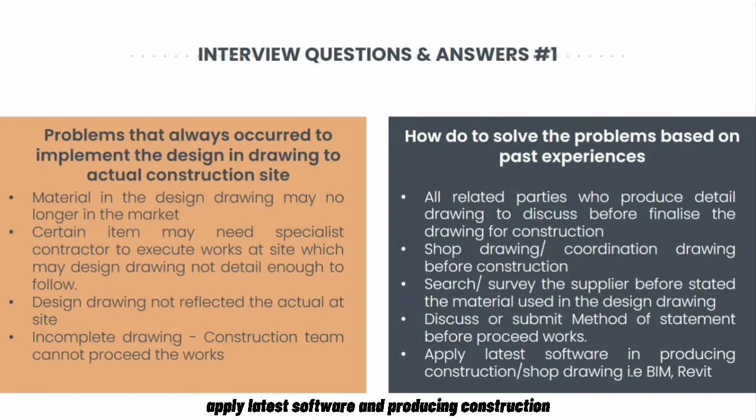Based on Mr. Muhammad Azri Sidek's opinions and experiences, all related parties who produce detailed drawings should discuss before finalizing the drawing for construction. Shop drawings or coordination drawings before construction. Search or survey the supplier before stating the material used in the design drawing. Discuss or submit a method statement before proceeding with works. Apply the latest software in producing construction shop drawings, for example BIM, Revit.

The next interviewee is Mr. Zamzan, who is an engineer and project manager who works at MTD Construction Sdn Bhd, for 29 years. Based on Mr. Zamzan, the problems that always occur when implementing the design and drawing at the actual construction site are: the actual construction site condition is not reflected in the construction drawing. The type of design or method of construction stated in the drawing is not suitable or practical to implement at site. Materials listed in the drawing are no longer available in the market.

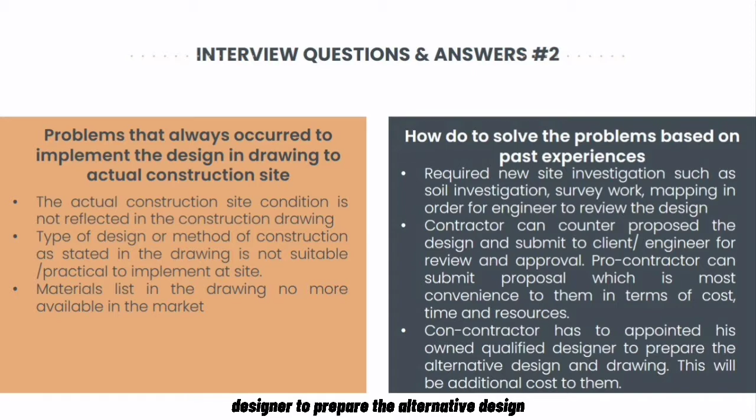Based on Mr. Zamzan's opinions and experiences, to solve the problems new site investigations are required, such as soil investigation, survey work, and mapping, in order for the engineer to review the design. The contractor can counter-propose the design and submit it to the client or engineer for review and approval. The contractor can submit a proposal which is most convenient to them in terms of cost, time and resources. The contractor has to appoint his own qualified designer to prepare the alternative design and drawing. This will be an additional cost to them.

The last interviewee is Mrs. Narashikan Ismail, who is a QAQC manager at MRT Corporation Sdn Bhd, and has 27 years of work experience. Based on Mrs. Narashikan Ismail, problems that always occur when implementing the design and drawing at the actual construction site are the disagreement between the structure, architecture, and M&E drawings. The majority of construction contracts use traditional processes such as fragmentation, or different designs based on trade, causing performance to hinder.

Based on Mrs. Narashikan Ismail's opinions and experiences, the way to solve the problem is to merge all trades engaged by using BIM software or a BIM-based process. Next, strengthen team members' communication, cooperation, and coordination during the design and construction stages.

Structural engineers are typically brought into a project by the architect or building designer and work on behalf of the project owner to evaluate and accept deferred submittals for compliance with the structural plans and specifications, monitor construction, and perform special inspections as defined in the contract.

Conceptual design: the first step a structural engineer will take is to go over the drawings created by the architect or building designer. To get an idea of the various uses of a structure, the engineer will consider a variety of unit types on a larger multifamily project, or the variety of room uses in a larger single-family home or commercial structure. The structural engineers will evaluate the structure's site-specific requirements based on its location. This will include a soil report to determine potential footings, the exposure category to design to, applicable wind loads, and seismic considerations.

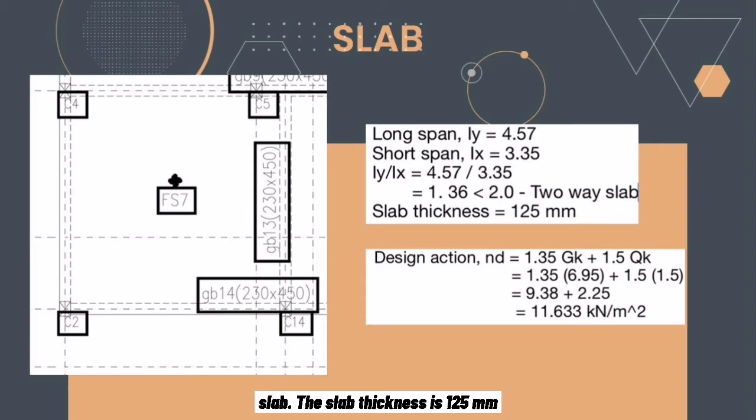Lastly is the calculations for our group slab and beam. This is slab at FS7. The X short span is 3.35 and the long span is 4.57. So we divided the long span by the short span to prove whether the slab is a one-way or two-way slab. The result is below 2, so it means that this slab is a two-way slab. The slab thickness is 125 millimeters. The design action is 11.633 kilonewton per meter square.

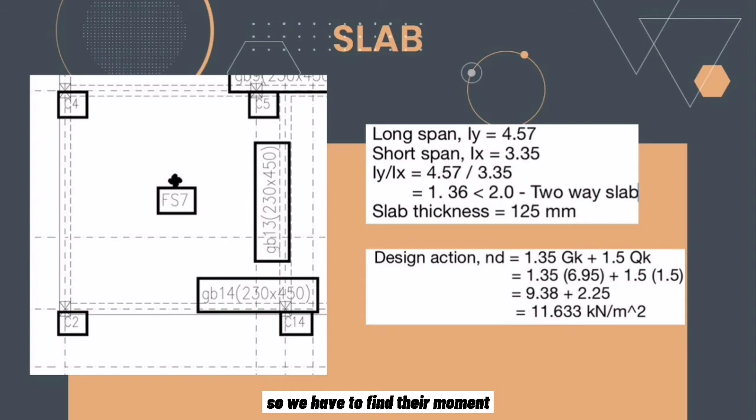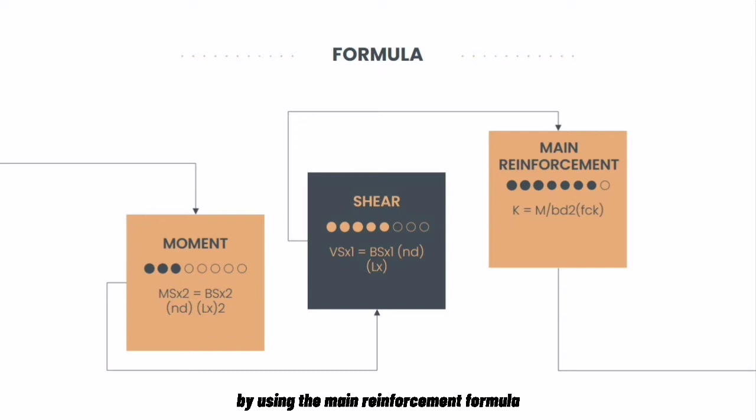For this slab, we figured that it is case 4, which is two adjacent edges discontinuous. So we have to find the moment and shear in the long and short span. These are the formulas for moment, shear and main reinforcement. After calculating moment and shear, we calculate the main reinforcement for this slab by using the main reinforcement formula to prove whether the slab has compression reinforcement or not.

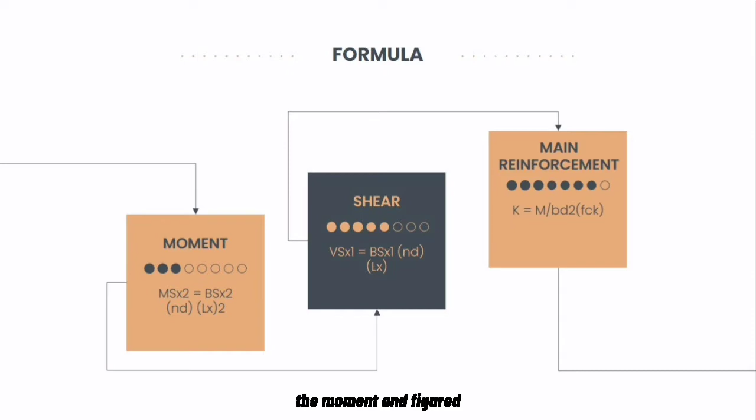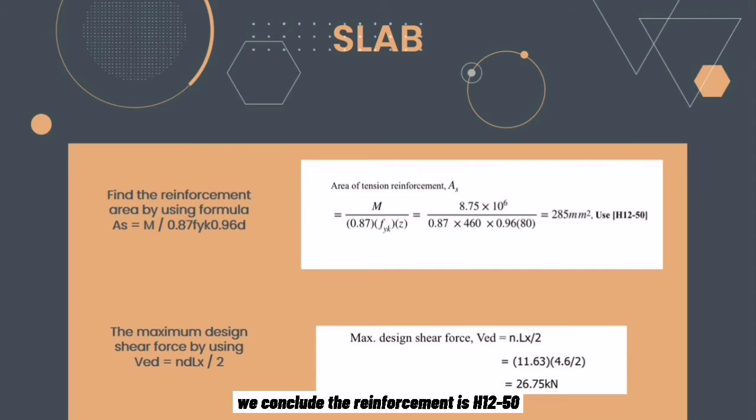We use the MSX 8.75 kN per meter as the moment, and figured that the slab does not have compression reinforcement. Then we proceed to find the reinforcement area by using the formula for area of tension reinforcement, and got 285 millimeters square. So from the table, we conclude that the reinforcement is H12 to 50 for the top.

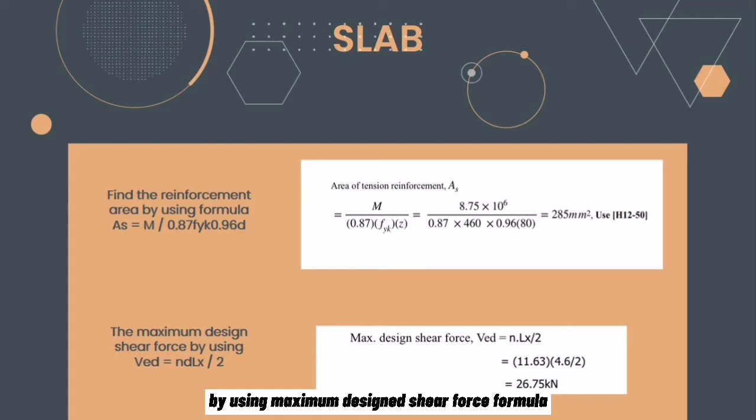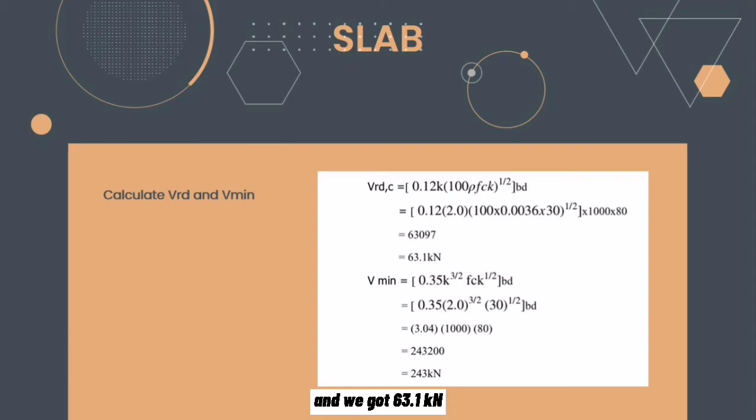For the shear force, we calculated the maximum design shear force by using the maximum design shear force formula and got 26.75 kN. Then we calculated VRD and we got 63.1 kilonewton. And lastly, we calculated Vmin and we got 243 kilonewton. So from all the data, Vmin is bigger than VRD, which means the slab is accepted.

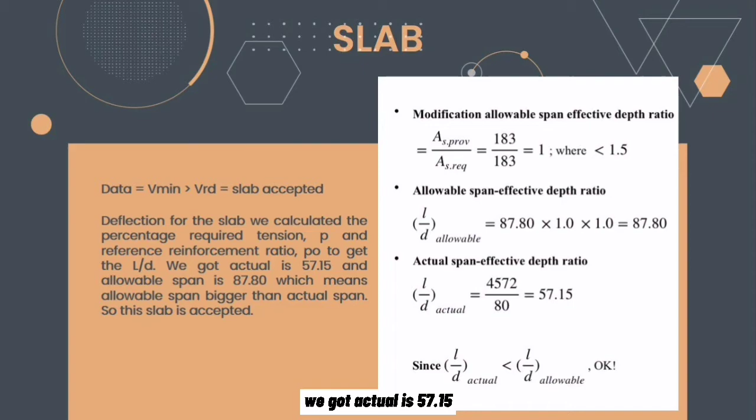For deflection of the slab, we calculated the percentage of required tension and reference reinforcement ratio to get the L over D. We got actual 57.15 and allowable 87.80, which means the allowable span is bigger than the actual span. So this slab is accepted.

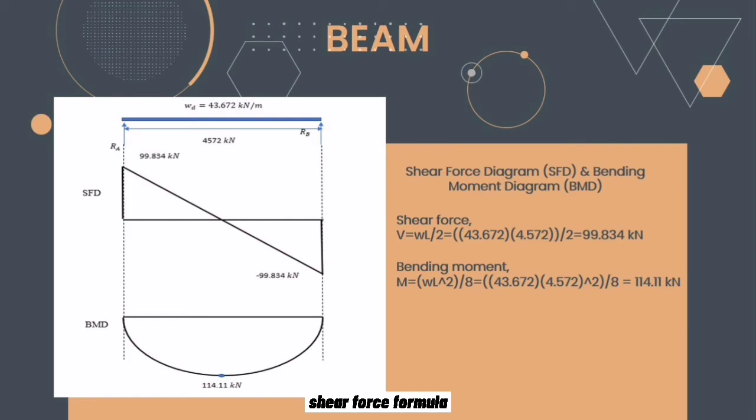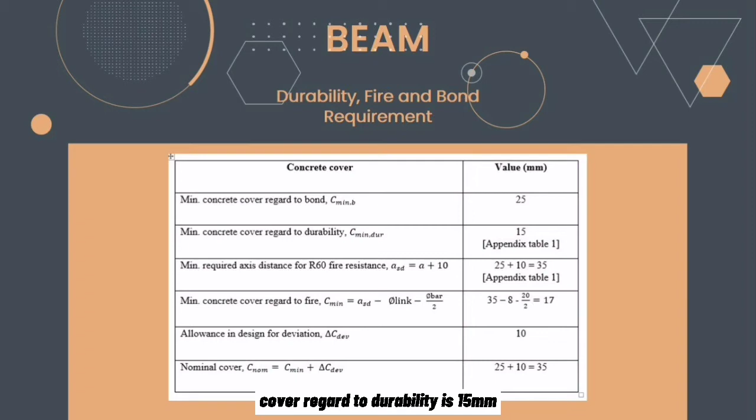This is the simply supported beam. The shear force diagram and bending moment diagram can be calculated using the shear force formula and bending moment formula. Durability, fire and bond requirements for concrete cover. The value of minimum concrete cover with regard to bond is 25 millimeters. The value for minimum concrete cover with regard to durability is 15 millimeters.

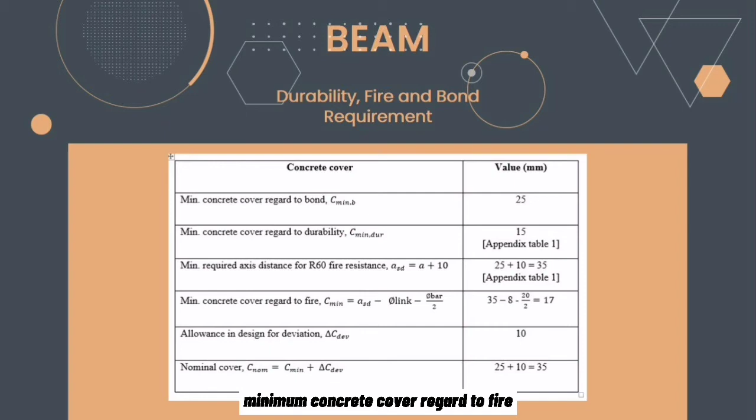Minimum required axis distance for R60 fire resistance is 35 millimeters. Minimum concrete cover with regard to fire is 17 millimeters. Allowance in design for deviation is 10 millimeters and nominal cover is 35 millimeters.

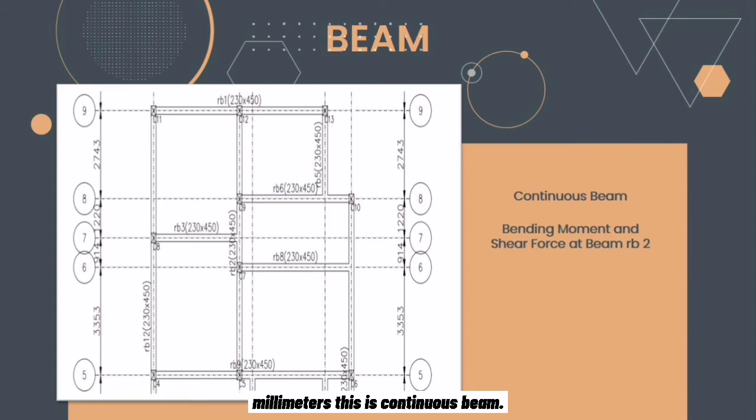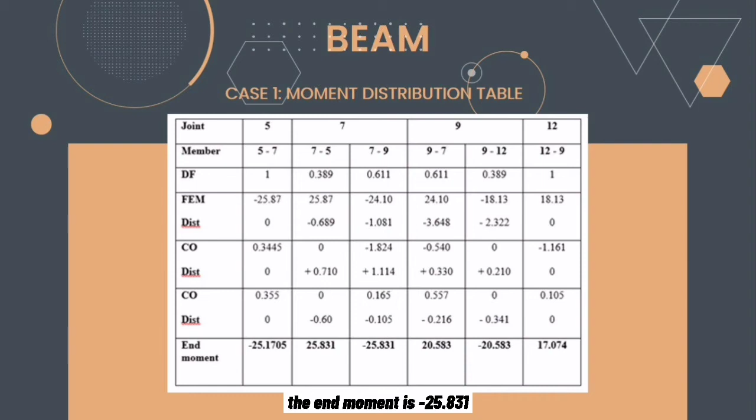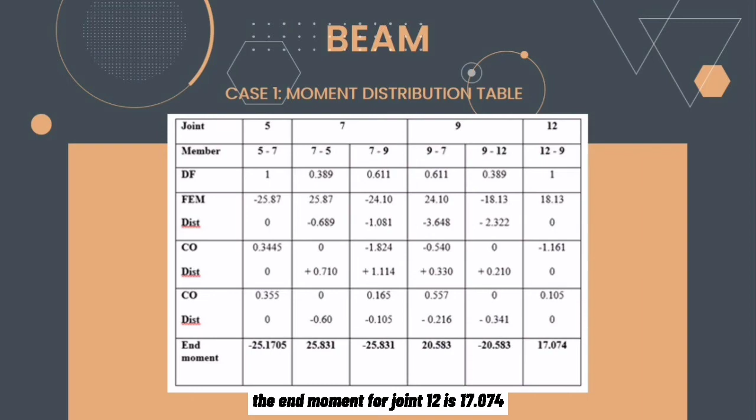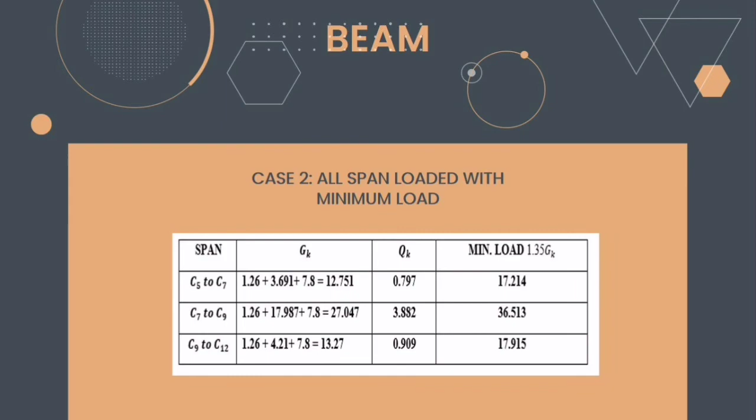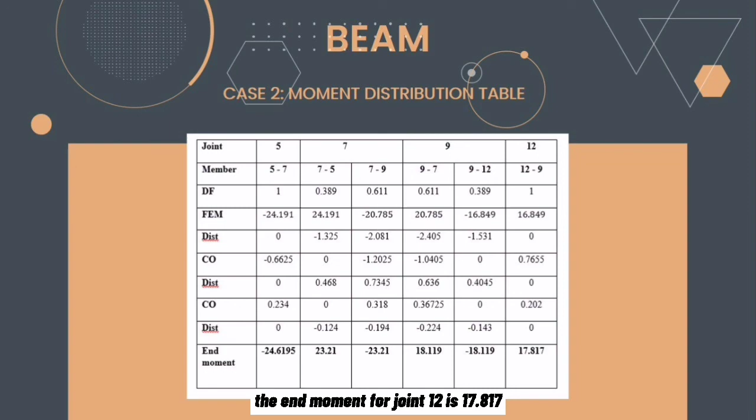For case 2, all spans are loaded with minimum load. This is the moment distribution table for case 2. For joint 5, the end moment is minus 24.6195. For joint 7, 7.5, the end moment is 23.21. For 7 to 9, the end moment is minus 23.21. The end moment for joint 9, 9.7 is 18.119, and 9 to 12 is minus 18.119. The end moment for joint 12 is 17.817. This is the diagram for case 2.